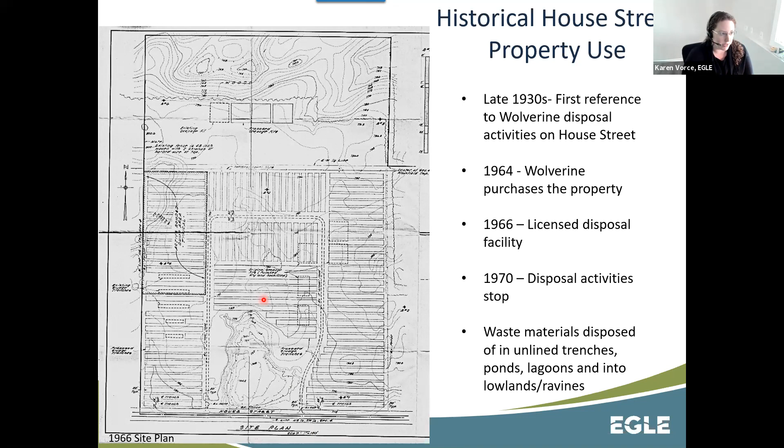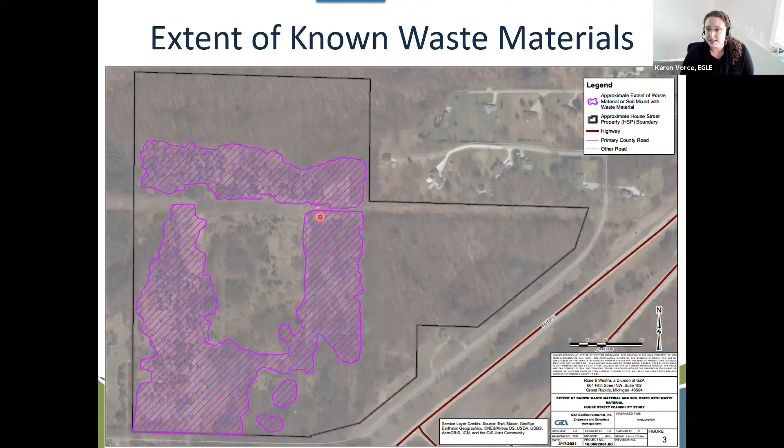It was gathered by Wolverine in 2018 and a little bit in 2019 under a US EPA unilateral administrative order that had Wolverine do quite a bit of work here. And then while Wolverine was there for EPA, we also had them sample for PFAS at the same time they were sampling for the non-PFAS contaminants for US EPA.

And so that's, you know, this is obviously why we're here tonight. This waste material needs to be addressed, remaining on the site.

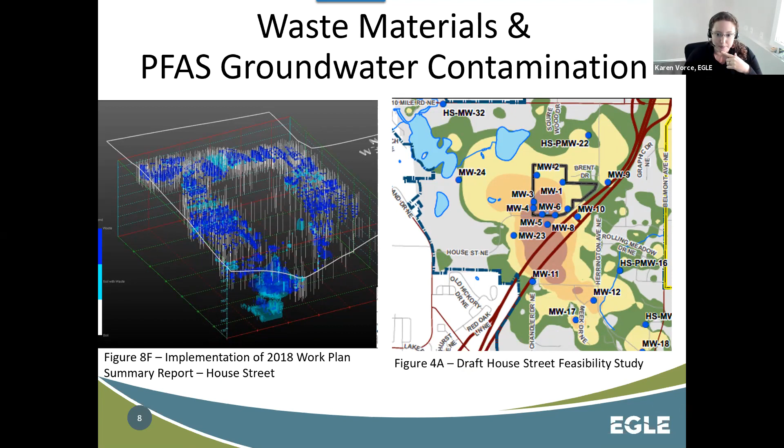So we'll move on to the next slide. This is where we get to the consent decree. I just wanted to go over the basics of that, because that obviously governs a lot of what we needed to see in the feasibility study, kind of the minimum requirements.

So in section 7.8, A says Wolverine shall conduct a feasibility study of potential remedial options for the House Street disposal site. The feasibility study shall be submitted to MDEQ, which is us.

We used to be MDEQ, Michigan Department of Environmental Quality. We were renamed to EGLE, or Michigan Department of Environment, Great Lakes and Energy. So don't be confused when you see MDEQ, that's just us. We just like to change our names sometimes.

So it had to be submitted to us within one year of the effective date. That's why we received it on February 19th, 2021, one year later from 2020.

And this next section is really important. Section 7.8A sub 2: the feasibility study shall evaluate the following remedy options to, one, manage solid waste at the House Street disposal site, and two, reduce and control potential migration of PFAS compounds from soils and sludges into the groundwater from the House Street disposal site. So those are the two main objectives the feasibility study needs to meet per the consent decree.

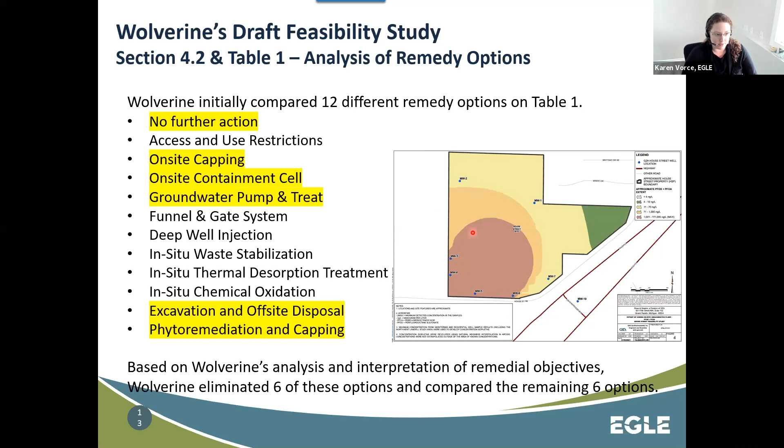This photo on the side shows where we have the highest PFAS groundwater. This isn't soils or sludges, this is in the groundwater. It does coincide with where that ravine is, and those trenches are right there on the southwestern part of the House Street property. This is a figure that was included in the feasibility study as well.

That would theoretically fall, if you remember back to 7.8, there was A, B, and C. That would fall under C, and other alternatives analysis is kind of what they're submitting this under.

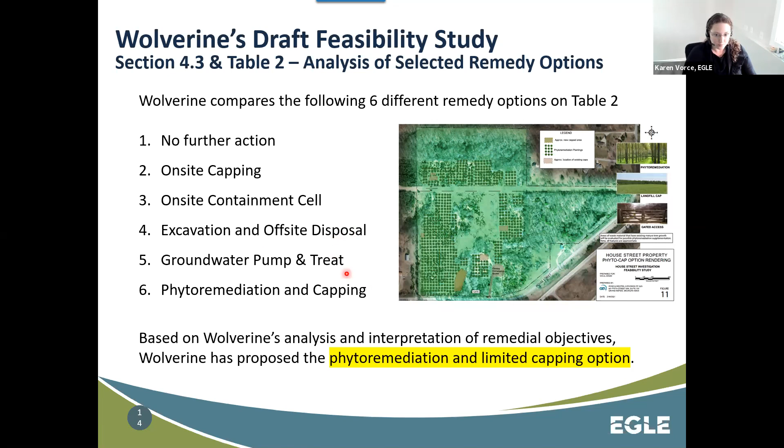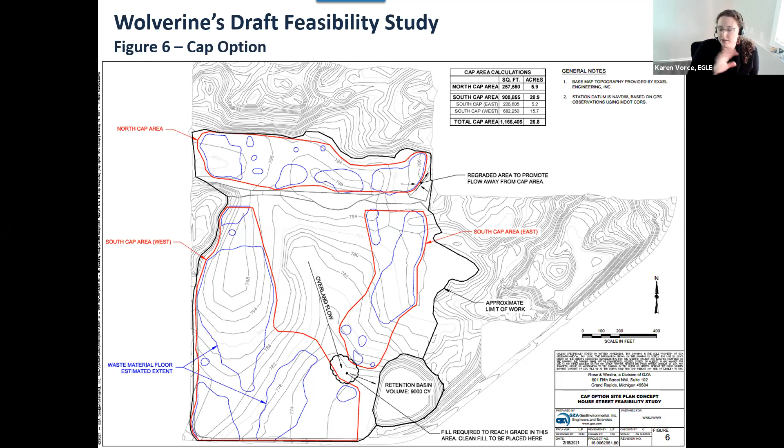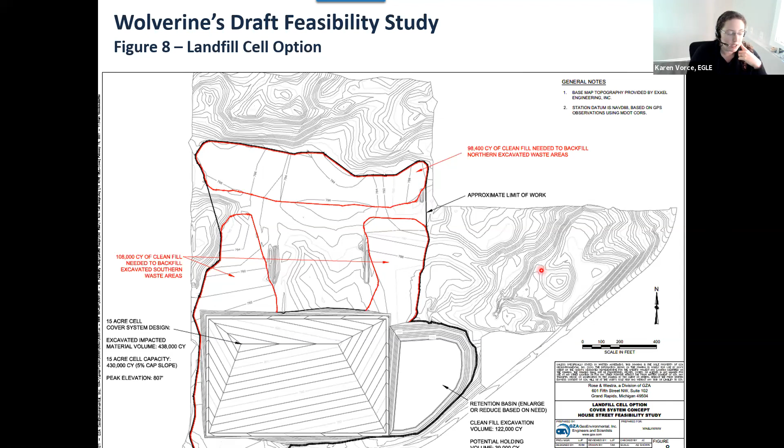Obviously, the water you're sucking out has to go through some piping over to a treatment building that would need to be constructed on site to treat the groundwater being pumped out of the ground. Either you treat the groundwater and then you have to obtain a permit through our Water Resource Division for a groundwater discharge permit, because you can't just discharge groundwater like that on the surface without getting a permit.

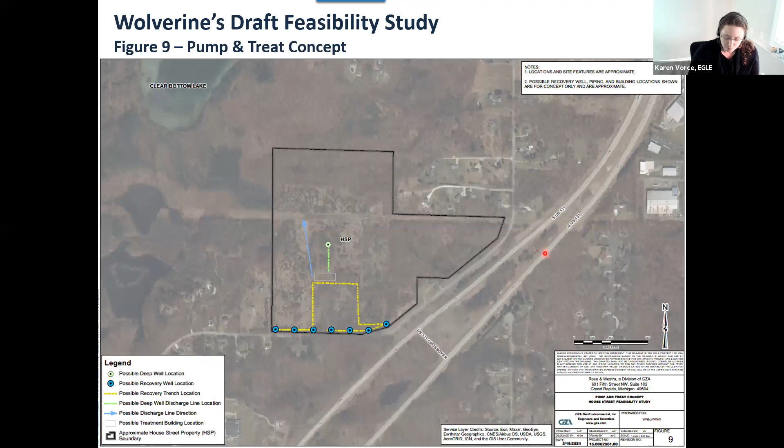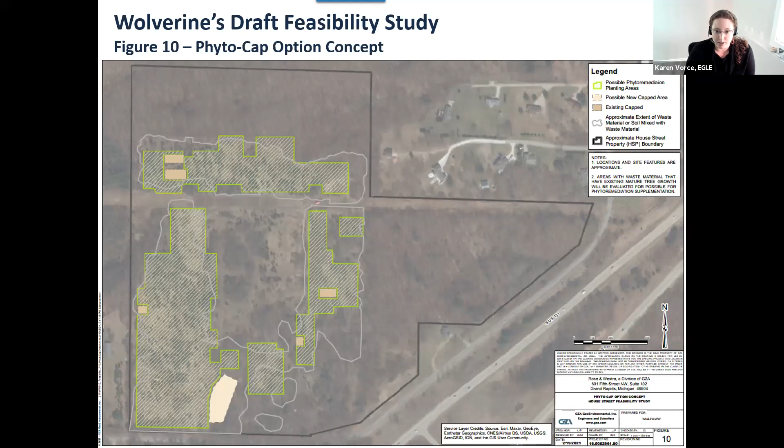And so when you read in section 4.3.6, and on table 2 for this option, Wolverine's proposing to plant, they say, as many as 4,000 additional trees and herbaceous plants. Basically, the idea behind this proposed remedy is that they would be using the roots of the trees to passively uptake the PFAS from the sludges slowly over time.

From my reading of the plan, I didn't see where it exactly identifies the exact species of trees that would be used here. It does mention that spruce, willow, birch, and other herbaceous species of grasses and forbs have been shown in different greenhouse studies and other studies on different scales of projects to absorb, to suck up the PFAS. Those are the types of species shown to do that, at least in those studies, which is why I think they mentioned them here. But again, I didn't see exactly where it mentioned these are the ones that would likely come in a later plan if it got to there.

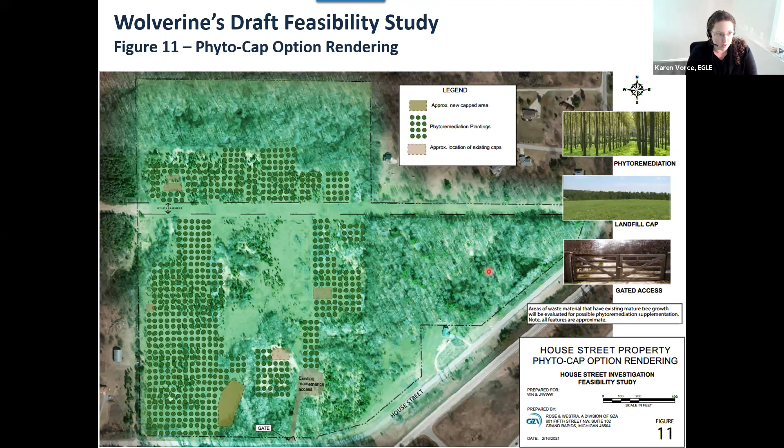So how does this remedy selection process actually work? I wanted to break this down because it can be confusing, so I want to try to make it as easy as possible to explain.

Based on our review, it's submitted to us, we're having to review it, and we're having it open to public comment because we want to hear from you and consider your input during our review. Based on that review of the draft feasibility study, there's really only 3 options we have based on the consent decree and based on 201: it's either approved, approved with conditions, or denied.

If the study is denied, a letter is given to Wolverine laying out all of the deficiencies, issues, and comments. At that point, Wolverine would take that letter, address all of those deficiencies, and resubmit a new plan.

There's also another option, depending on our response to them, called the dispute resolution process, which is in the consent decree. It basically provides that it would be mandatory for us to go into if this does go to dispute resolution. I want everyone to understand that if we go into that dispute resolution, we have to meet with the technical mediator—there are court requirements on this.